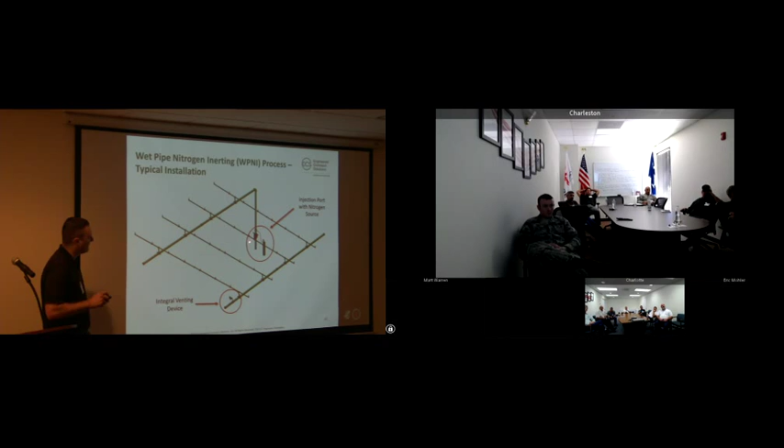So it's very, very important to vent the oxygen out. You have to get the oxygen out. You can't just dilute it, because the oxygen molecule, if left in there, will react. So what does that look like on a system? Back at the riser, which is at the top right-hand corner of the screen here, we have our valve that we would normally have, our alarm check valve. We install a port, and that just allows us to hook up a source of nitrogen.

A lot of times in a wet system, we're going to use a cylinder of nitrogen because we just need nitrogen up front. We don't need to keep nitrogen on the system or recharge the system after a given amount of time. We just need to purge the pipe network before we fill it with water, and then we don't have to do anything with nitrogen until we drain the system again. So from the economics of it, it makes sense to use cylinders unless you have a large warehouse or a lot of systems where it would be cost effective to install a nitrogen generator.

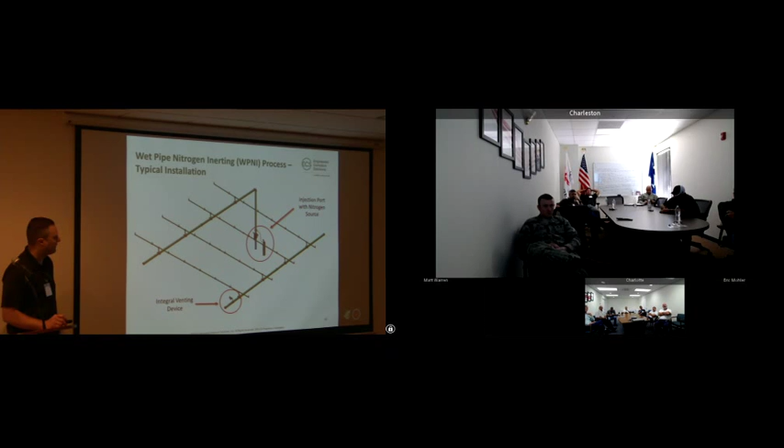Then what we do is we go to the opposite side of the system and we put a vent on the system. This is how we're going to inject the nitrogen, pull it across the system, and get that oxygen out. This is what our vent looks like. And our vent is unique, it's actually patented.

The patent sits around the fact that it has 2 independent float valves in series on it. What that does is it reduces your need to pipe anything to drain. There's 0 failure risk from water shooting out of this thing because it's redundant. It's a float valve that we've used in the industry for years. But this is what we use to get the oxygen out. And you'll note there's a little gauge here, a little regulator, and some brass hanging down. That's a very important part.

You can't just put a vent on the system because an air vent would just vent nitrogen as fast as you're putting it in. But we can't do that because when we do that, gas is like electricity, it's like water. It's going to look for the path of least resistance.

If we didn't retain pressure and cycle the pressure in the system with nitrogen, we'd do a really good job of inerting from the point where we're injecting the nitrogen to the point where we have the vent that the oxygen's coming out, but we would do nothing to address any of the branch lines or any of the dead ends of the system. What this vent's designed to do is hold pressure in the system.

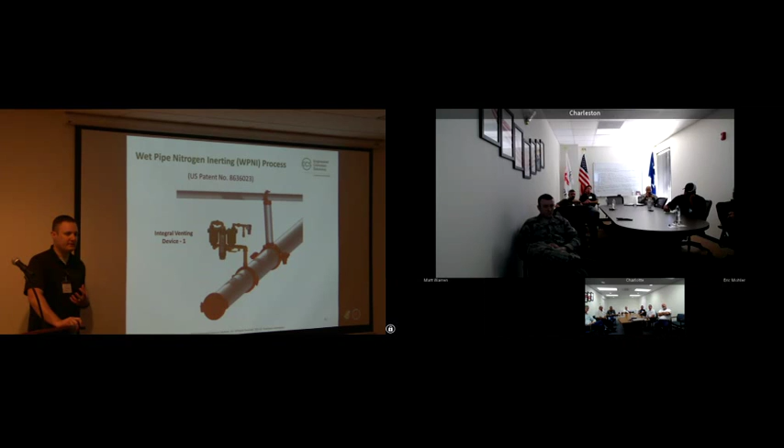So when you're inerting the system, you're actually going to cycle nitrogen in and out of it. What that does is it mixes the nitrogen into the oxygen content, and then it pulls it back out. This is just what the nitrogen vent looks like. But this is the illustration of what we're actually doing when we're purging the pipe network.

The purging process is very, very simple. It just consists of 3 cycles of filling the system to 30 psi with nitrogen and then letting it come out. So all we're doing is just pressure cycling. It's called sequential dilution, and the goal is to bring the oxygen content out of the system and get it to a point where it's sitting at 98% nitrogen at atmospheric pressure.

So we're moving it from 78% nitrogen in atmosphere to 98% nitrogen in atmosphere, and that's the whole process. That's all there is to it. We've been doing this for almost 5 years now. The first facility we ever did this was a satellite manufacturing facility. FM Global brought us in. They built satellites there for the government.

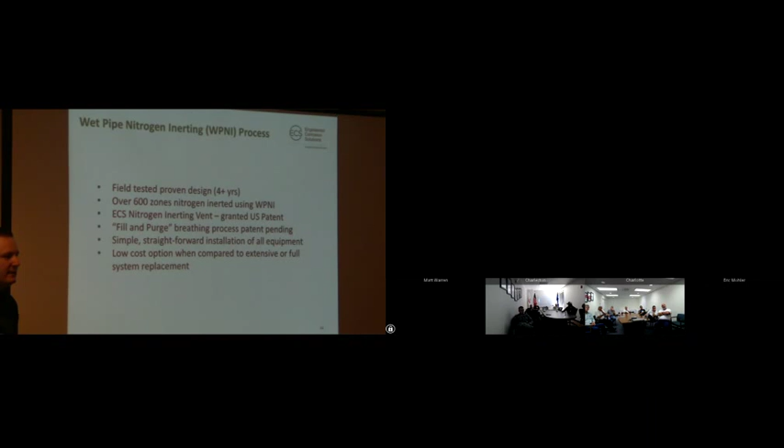They had a 1 million square foot facility that was having a leak every week. And if you can imagine this, they had about 25 satellites, and these things cost about $500 million a piece. Their system was leaking so bad that they literally had blue tarps from Home Depot strung up over these satellites, protecting them from the sprinkler system. That's how bad their problem had gotten. So they called us in.

We told them we've been doing dry systems for a very long time, and that we could look at the solution for the wet systems using the same principles. Initially, they told us no. The fire marshal did. He said he didn't want to be a guinea pig. But we said, we understand your reluctance, but why don't you go talk to some of your research departments, some of your guys that have PhDs in corrosion specifically, and see what they have to say about it. Well, they came back and said, yeah, this will be acceptable.

We did it for them. We didn't replace any pipe. No pipe replacement at all. And we inerted all 25 systems. They went for 4.5 years without having a leak. They had a leak about 6 months ago. And we said, well, what'd you do different? They said, we didn't do anything different. We said, you did something different. You don't go for 4.5 years with no leaks and then have a leak happen.

Well, what they did was they had some of their maintenance guys replace a flow switch. They didn't follow the protocol for draining the system down and keeping it inert. That one drain and fill introduced enough oxygen for them to have another leak. They called the contractor out to inert the system again, and they've gone another 6 months without having a leak. So the process is very, very effective.

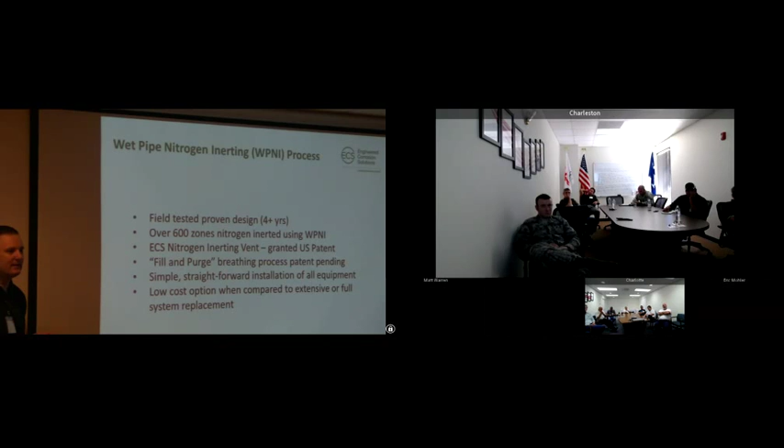I'm not going to say every single system can be saved without any pipe replacement, but we do have great success sometimes in eliminating leaks without any pipe replacement. So it's simple, it's straightforward. It relies on the pressure cycling process to exchange the gas, and like I said, it's proven technology.

Let's switch to dry pipe inerting. We covered wet pipe. Wet pipe's fairly simple. Dry pipe, same science, a little bit different application. And we still have the same things. We still need the nitrogen. We still need a way to get it into the system, and we still need a venting device because we have to get the oxygen out of the system.

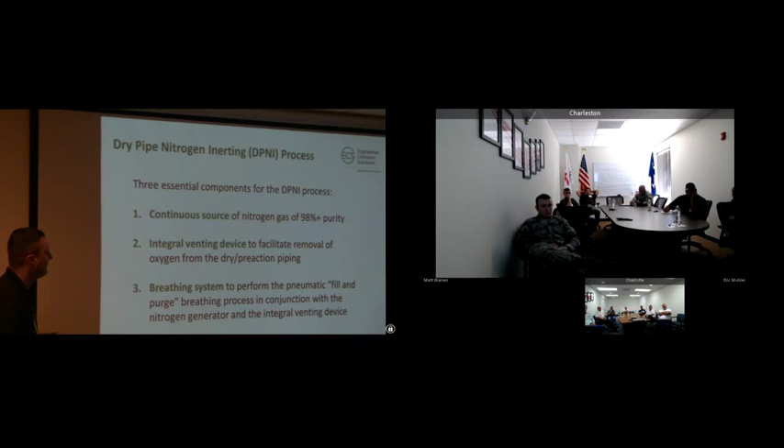But because we have to have a compressed gas source, a supervisory gas source, on the system at all times, we have to have nitrogen there at all times, because we can't inert the system and then start putting compressed air in from an air compressor. That just negates everything we just did. So we want to have an on-site nitrogen source, a nitrogen generator hooked up to the system so that it will keep the oxygen purged out of the system.

We could build a nitrogen generator that would meet the 30-minute fill requirement for whatever size system you have. But as with anything else, the larger you go, the more expensive it is. The nitrogen generation process is about 50% efficient. So if I have a 2 horsepower compressor and I'm putting out 18 standard cubic feet a minute of compressed air, I'm only going to get about 9 standard cubic feet a minute of 98% nitrogen out of it. So effectively, to meet the 30-minute fill requirement, we'd have to build your nitrogen generator twice as big.

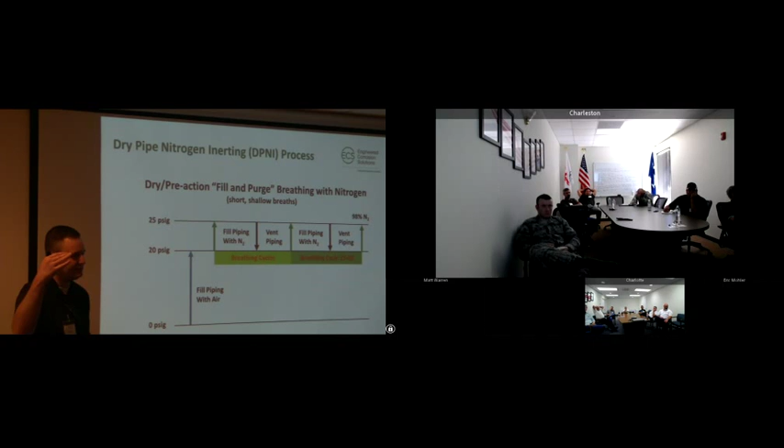So in order to be conscious of cost, we came up with a process about 8 years ago where we have a bypass on the generator. So you can fill your system with compressed air. We can meet the 30-minute fill requirement. Once we get the system set, the valve set, the system's live, we switch the valve configuration over on the nitrogen generator, we start putting nitrogen in.

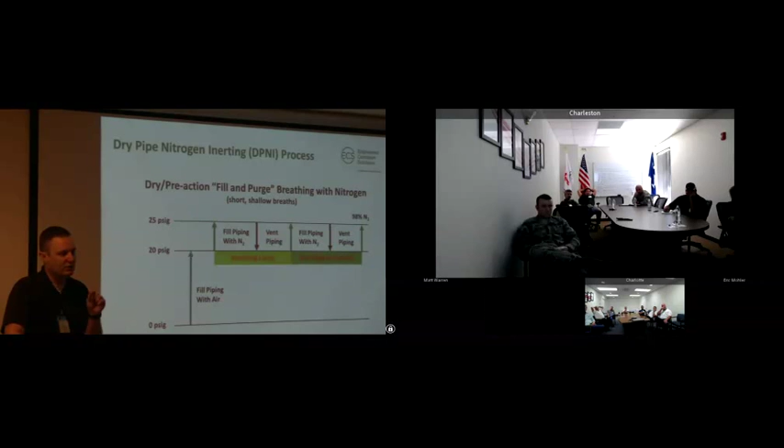What we're going to do, and what's illustrated here on this slide, is we're going to cycle somewhere above your low air alarm, but below a higher air alarm if you have one. We're going to pick a range of about 3 to 5 pounds. We're going to put nitrogen in, and we're going to let it come out. It's the same thing we were doing with wet systems, except we're doing it at a much lower pressure range. So it takes a little bit longer. But we still need to have the oxygen out as quick as possible.

We started developing this protocol actually with the Navy, and they said, well, if you're going to develop something, you have to have a standard. So we just came up with a good rule of thumb: we want to be at 98% nitrogen in the system after 14 days. Now, if you talk to anyone that sells a nitrogen generator for the fire protection industry now, they're going to tell you 14 days, 98%. You can ask them where it came from, they'll have no idea. I can tell you it came from us, we were working with the Navy.

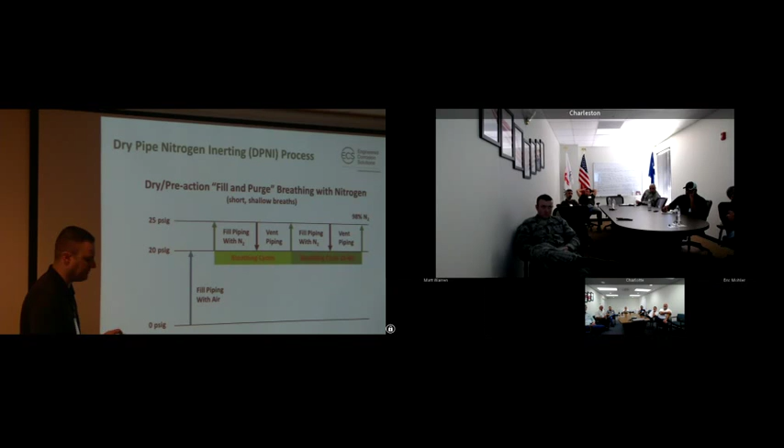But ideally, at the end of the 14 days, if not before, we're going to be at 98% nitrogen throughout the entire system. Then the generator is just going to come on and act like an air compressor and just keep that supervisory nitrogen pressure where it needs to be. This is what it looks like.

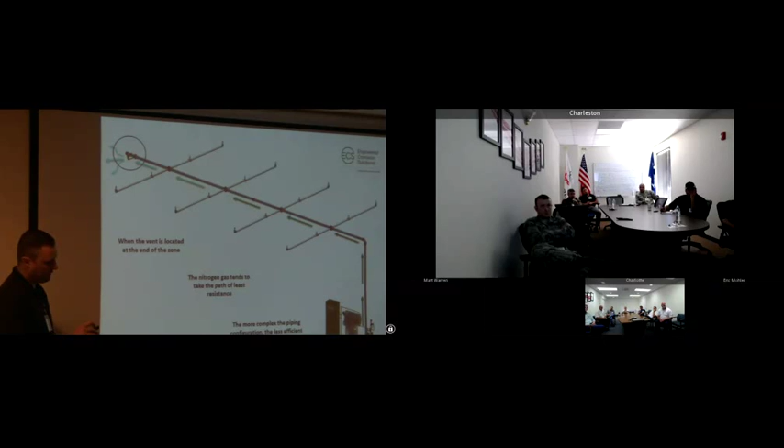Because we use the pressure cycling method, it allows us, so here, let me show you this. If I just kept a continuous pressure in my fire sprinkler system and I'm just putting nitrogen into my system and then letting it vent out, trying to push the oxygen out, I'm going to do a really good job of inerting this main piece of pipe where those arrows are. I'm not going to inert anything where the branch lines are because there's no reason for the gas to go down that way.

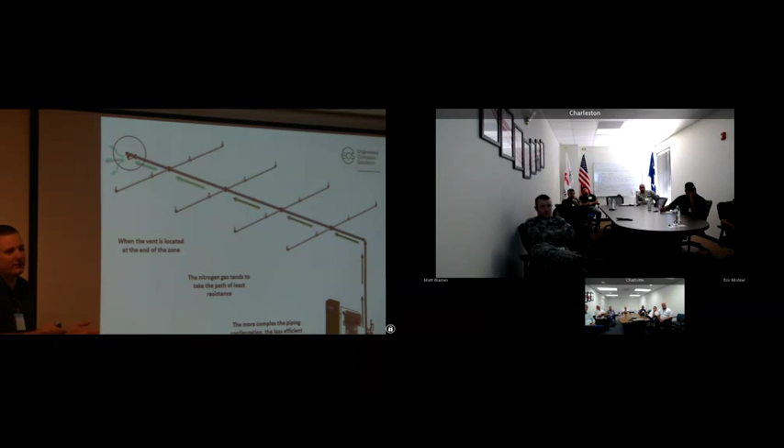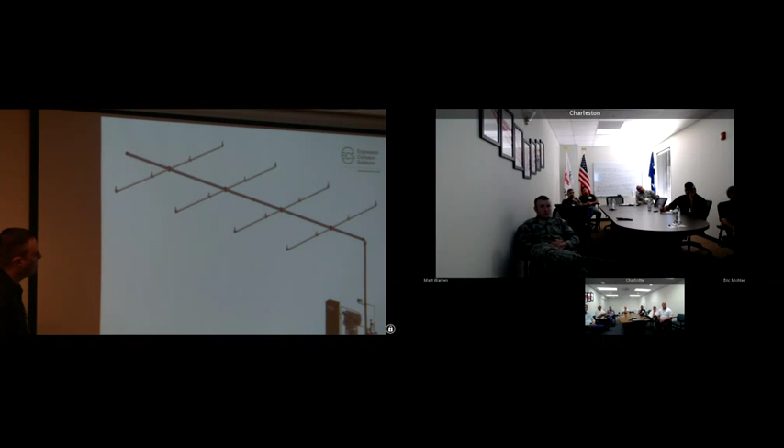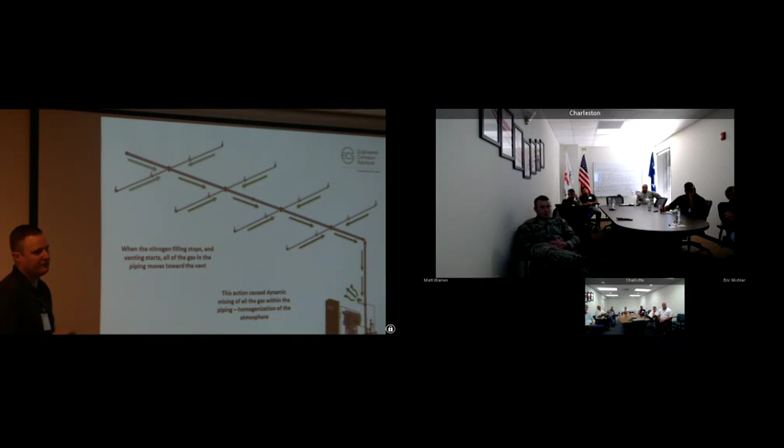I could put the vent at the end of the main, I could put the vent at the end of the branch line, but I can put it anywhere because the gas is always going to come back out to wherever that vent is when we do our pressure cycling. This is just a little illustration of what's actually happening.

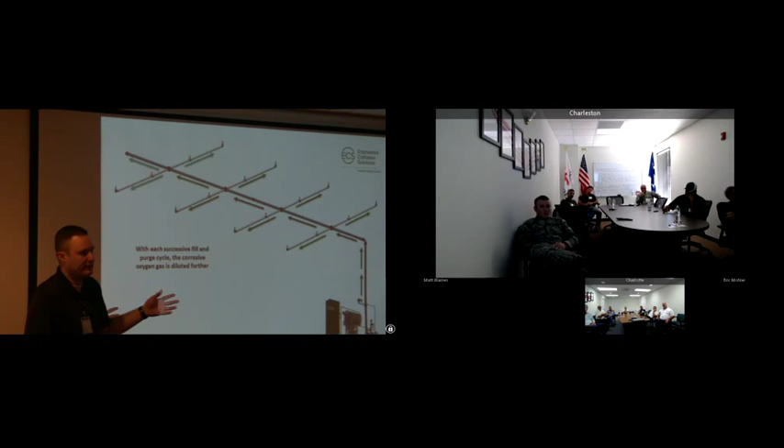So when you draw it out of the system, you use a vacuum or you just allow it to flow out? When we pull the gas out of the system, we just allow it to flow out because this system's always going to be higher pressure than atmosphere. So we just open a valve, we give it an opportunity to go to atmospheric pressure, and it naturally will come out because we have a positive pressure in the system and a lower pressure in the atmosphere. Yeah, just wondering because in refrigeration we draw a vacuum.

That's a good question. I get that a lot. We looked at drawing vacuums. We found we didn't get much of a benefit from it because if you draw too much of a vacuum, you suck oxygen back in through your roll groove fittings. And so you're pulling oxygen back in. So we found just using positive pressure was a better application than using negative pressure. But yeah, I do get asked that.

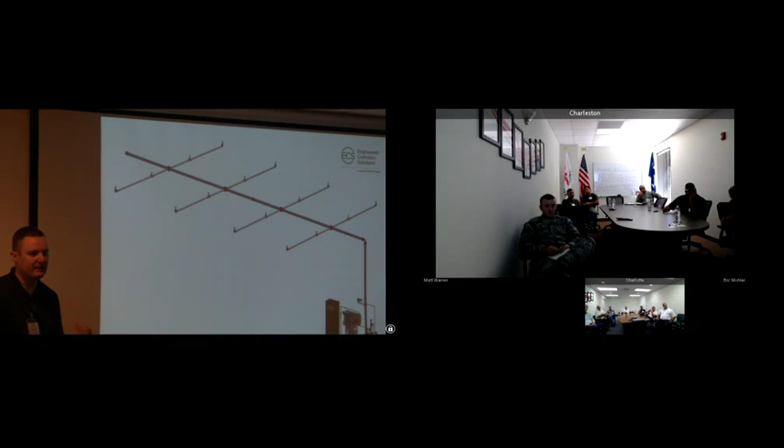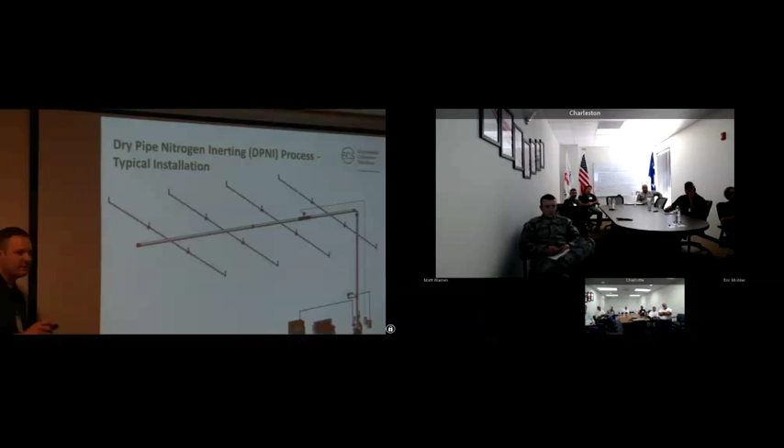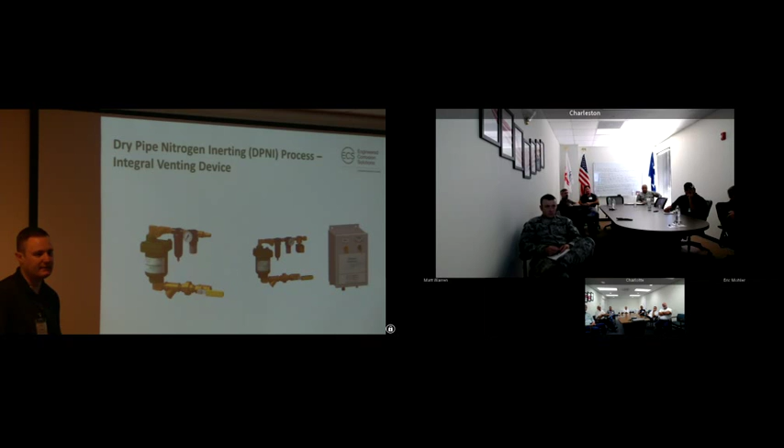It's just the same setup. We have a nitrogen generator, an air compressor, and a vent. That piece up at the top on the main, that's one of our monitoring devices. It monitors for corrosion. We'll look at that here quickly. This is what a nitrogen generator looks like. It's a big filter, that's all it is. It filters compressed air and filters the oxygen out of it. Venting options: you can have manual vents or automatic vents. With a manual vent, someone has to open it when the valve's set and come back after 14 days and close it. The automatic vent, you set it when you set the valve, and no one has to come back and close it. No human intervention there.

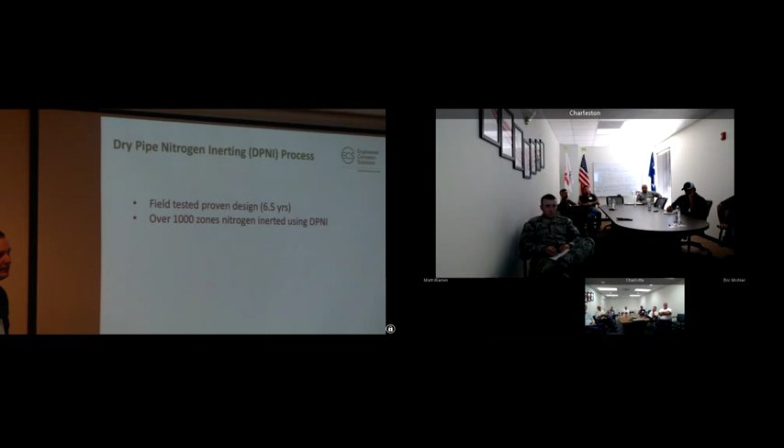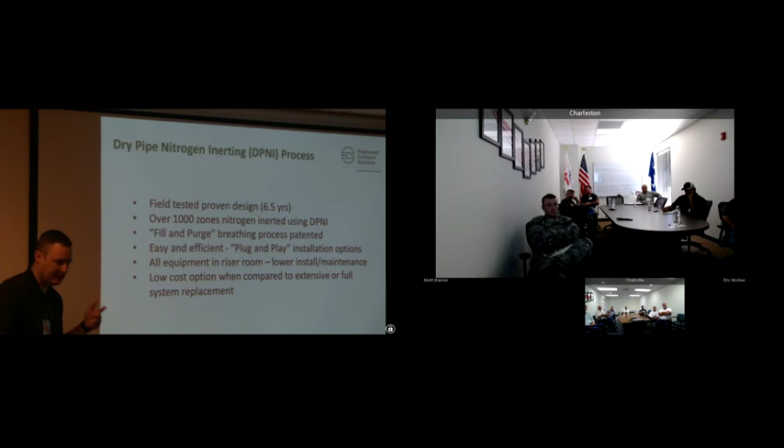Dry pipe is where we started. We brought it to the industry. We have a longer track record with our method than anyone else out there. It's easy, efficient. We're always looking for ways to make it less expensive, easier to operate, and more reliable. So we're continuously improving the offering.

You talked about filling the tanks and using it on the wet system. Can you use this generator to fill your own tanks? You can. The question was, can you use this generator to fill nitrogen cylinders? This is a low pressure generator. The maximum output nitrogen pressure you're going to get is around 100 pounds. Cylinders are around 2,800 pounds. You'd have to get a booster pump. It's very expensive, and you've got a lot of safety issues. Theoretically, yes, you could do it if you had enough money to put in the infrastructure. But you could buy a lot of nitrogen cylinders with that amount of money.

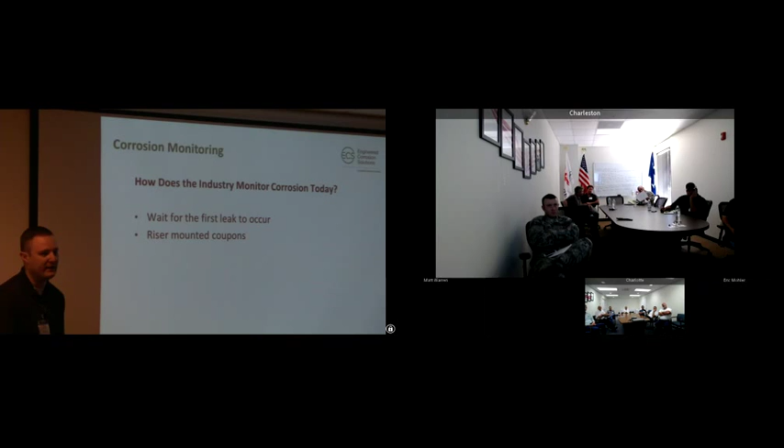The very last thing we're going to touch on here is how do we monitor corrosion in our industry?

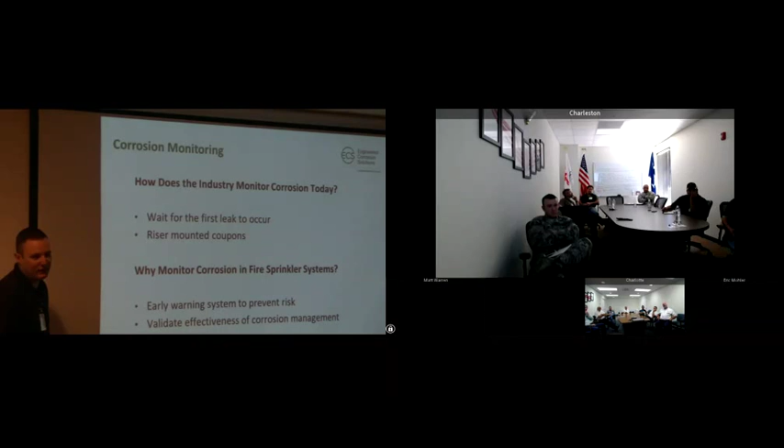One way is, I was told one time in the presentations, we look at the ceiling tile and wait for the orange spot to show up. So not a good way, right? There are different coupon methods out there right now. We sell a coupon method. It's kind of our first generation technology. We came up with a better way.

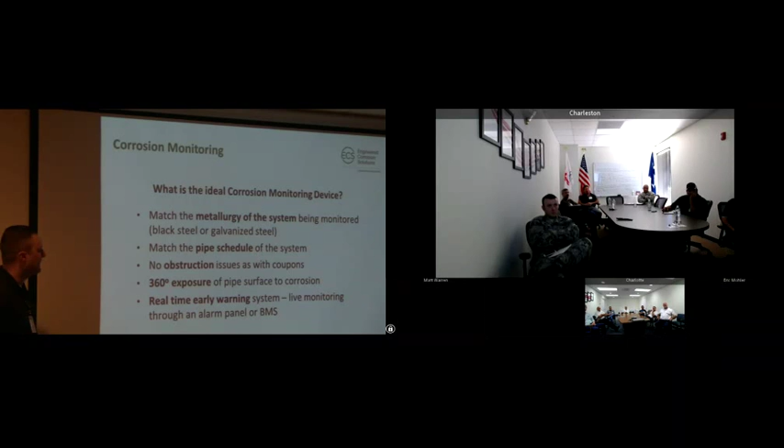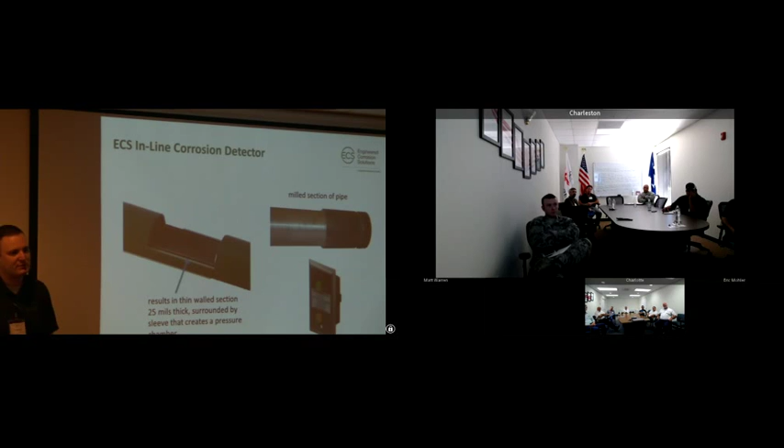We weld a piece of pipe over that. It forms a little interstitial space there. That space, we then drill and tap it. We put a pressure switch on it. When enough corrosion has taken place to get through that 25 thousandths of an inch, the system pressure goes into that annular space and activates the pressure switch. We know we have corrosion. We know something's going on with the system. This is extremely accurate and responsive.

We had a data center out here on the East Coast. They put 39 of these in, one on every system. They were hydroing the systems. Before the nitrogen went on, they had them on compressed air for about 8 weeks. We had 2 of them go off in 8 weeks. Once we put the nitrogen on the system, we haven't had one go off in 2 years. So they do exactly what you want them to do. They tell you you have a problem before you have a leak, before you have to replace the pipe.

This is just some code references. No one here deals with the UFC. That's the government standard for buildings, DoD standards. NFPA 13, we talked about this, corrosion inhibitors are going away because they're not listed as compatible with the gaskets. This is kind of important. When we looked at the pictures of the galvanized pipe versus the interior of the black steel pipe, we saw the roughness of those two was comparable. You used to get a hydraulic advantage for using galvanized pipe. NFPA 13 has now removed that because they've seen the interior pipe after a given amount of time is actually rougher than the black steel equivalent. So you no longer get a hydraulic advantage for using galvanized pipe.

So when you walk out of here today, things that I'd like you to take with you: oxygen is your problem, MIC isn't. Oxygen corrosion is cumulative. So unless we address the oxygen getting into the system, we're always going to have corrosion problems. And when we use nitrogen, it's still important to get the oxygen out quickly, and out of the entire system, not just from point A to point B, or from the injection point to the vent. So the pressure cycling is very important. And then an effective means of corrosion monitoring should be employed. You need to know that what you're doing is being operated effectively, basically performing what you're paying for.